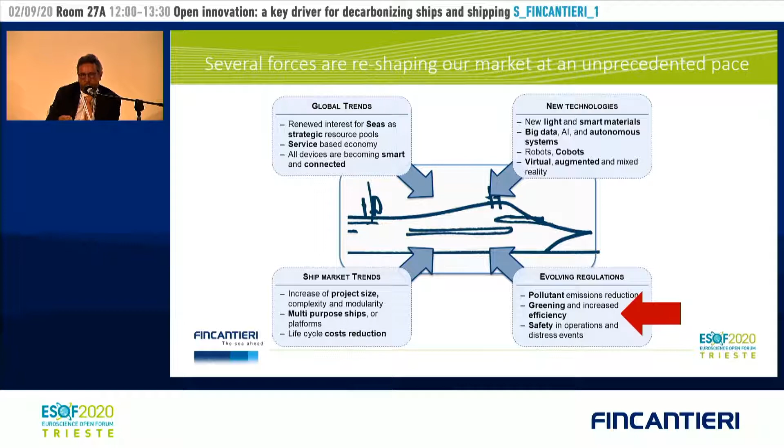One of the main reasons why we are talking about decarbonization is the evolving regulation, and also an increasing request from the customers, from the ship owners, and from the final customer to make shipping greener. We have developed 5 pillars in our research and innovation strategy, and the green ship, that is decarbonization, is one of the most important. For each of these pillars, we have defined very challenging goals.

If we talk specifically about the green ship, in the next decade we want to increase ship efficiency by 30%. We want to eliminate every ship emission in ports and halve navigation emissions. We want to promote the use of reusable and recycled materials during shipbuilding, and we will also decrease onboard and underwater acoustic emissions, that is noises.

This is a picture about how decarbonization could look. Today, the state-of-the-art technology is to generate electricity on board a ship through a combination of traditional internal combustion engines and liquid natural gas. This is the state-of-the-art today. What could happen in the medium term?

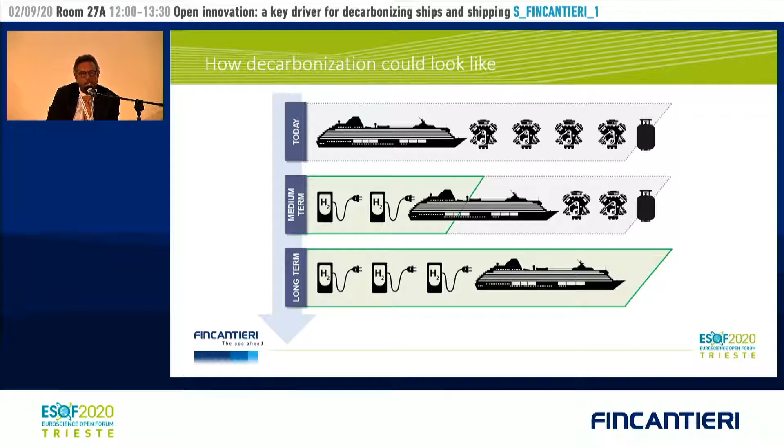In the medium term, we see some sort of electrification. We think we can use, for example, hydrogen for generating electricity on board a ship, and in the long term we could have cruise ships that are completely fueled by hydrogen.

Now, I would like to propose to my colleagues around the table, Pierluigi, Alberto, Alessandro, and all the others, this scheme to drive to some extent the panel. The main question we would like to address during this session is how difficult is it to decarbonize ships, which are the most complex tasks ahead of us, what are the risks and opportunities, and what is the right balance between incremental innovation and radical approaches in order to cope with this difficult task?

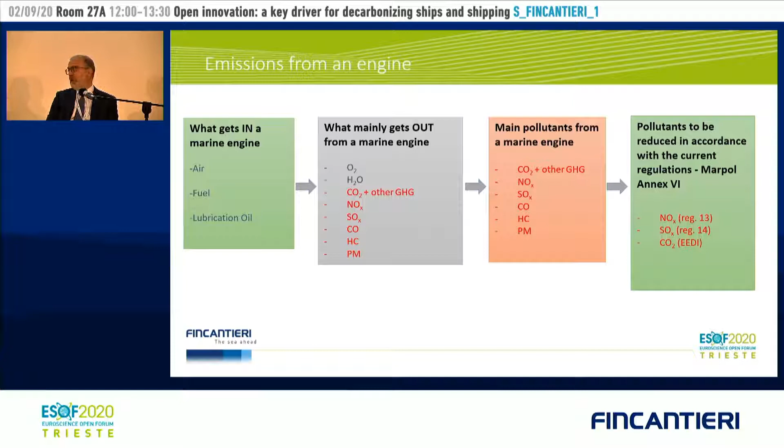In the regulation, there are only three main pollutants: nitrogen oxide, sulfur oxide, and carbon dioxide. Particulate matter is also mentioned in the regulations, but there is no limit set on particulate matter.

Which is the shipping emission in the world scenario? In the world scenario, shipping has a global emission of 18–30% of nitrogen oxide, about 9% of sulfur oxide, and 3% of carbon dioxide.

About the limit, the historical limit of NOx emissions, this represents the various stages that have been put on the table over the last years. We have up to 2011 Tier 1, up to 2016... Tier 2, and now for the ECA areas, there is the Tier 3 limit coming into force in 2016.

How can this be reached? This has been reached first by having engines certified EIAPP, and also by introducing the SCR to capture the emissions.

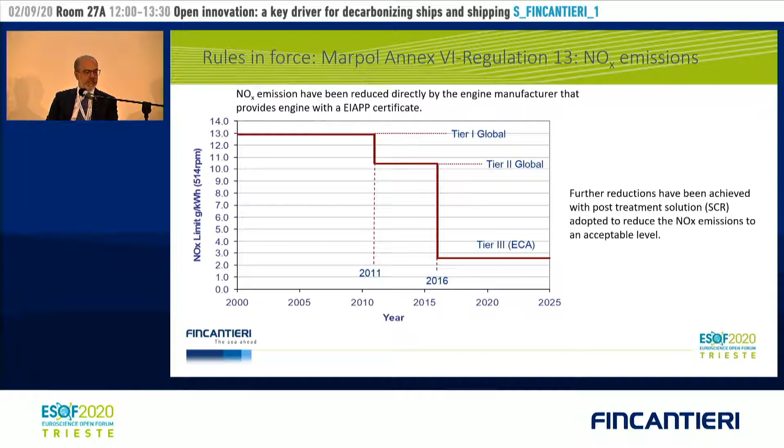This is the status of SOx, the sulfur oxide, where there are two diagrams, one for the global area and one for the ECA area. Today, the latest limit for the ECA area is about 0.1% of sulfur in terms of fuel volume. How can this be reduced?

In recent years, we installed scrubbers that allow us to reach this target.

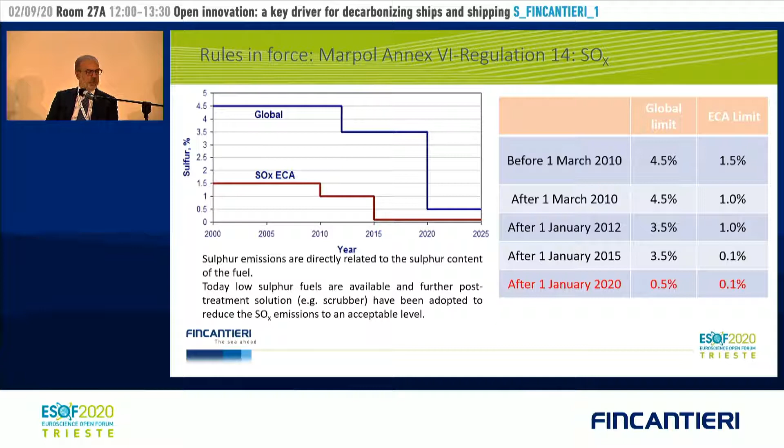After that, there is the EEDI, that's about CO2, related to the efficiency design index for the emission of CO2. Up to 2013, 2015, there was a limit below the reference line related to 2009 emissions.

After phase 1, we passed between 2015 and 2020 into phase 2, and the next target is between 2020 and 2025 to reach further reductions. There is also a phase 3 coming after 2025, but it seems IMO is discussing anticipating it.

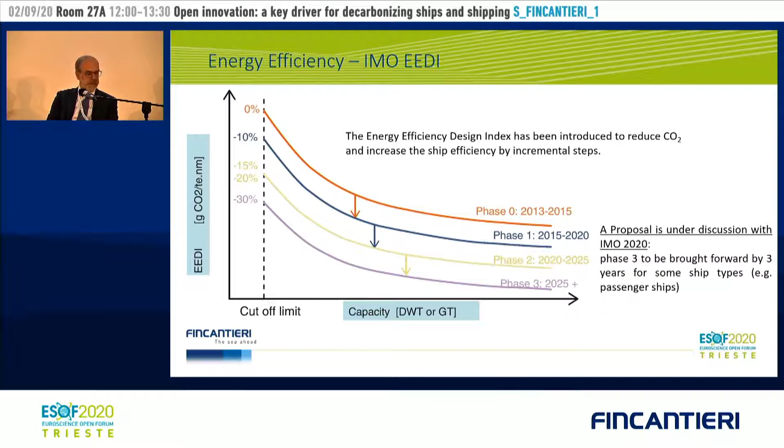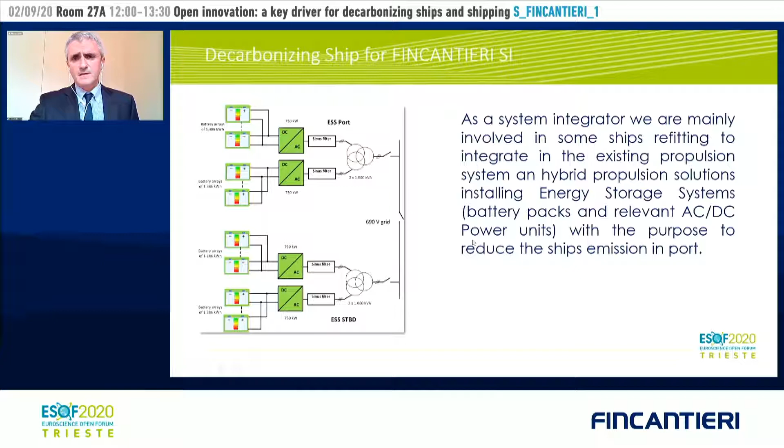An example of this application was Grimaldi cruise Roma and Barcelona, where the energy storage system has a battery capacity of around 5,000 kilowatt-hours and a nominal power of 3,000 kilowatts.

With this configuration, considering that the installation of this kind of system is to reduce the emission of the ship in port, we can identify the following operating modes of the ship.

During navigation, the ship is powered by the diesel generator, and the power units of the system are charging the batteries. During long port stay, the required power for the ship is provided both from the energy storage system in parallel with the diesel generator, with the result of reducing the number of diesel generators in operation.

The third mode is short port stay, where the energy storage system is the only source for the power supply, completely substituting the diesel generator. At the end, the UPS mode: in any situation, this system is always ready for ship blackout prevention.

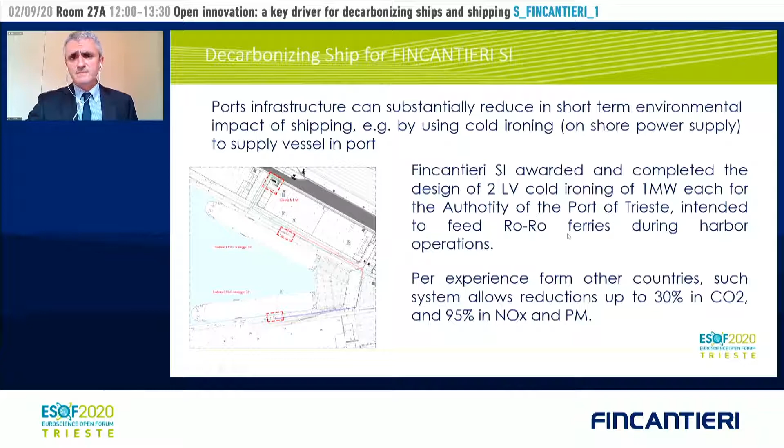Coming back to the original question, how difficult is decarbonizing the ship? It's clear that the use of battery systems can only be limited to operation of low power vessels and for short sailing distances. The use of clean alternative fuel can be a solution to guarantee the autonomy required by the ship. In this configuration, the battery will play the role of typical network services.

This means that the architecture of the ship must be redesigned to accept this type of solution. It requires space significantly greater than that required by a fossil fuel system.

What are the risks and what are the opportunities? We have the opportunity to improve the environmental behavior. So we believe that whatever risks are introduced by the new technology solutions, we are convinced that they can be addressed and mitigated. Thank you.

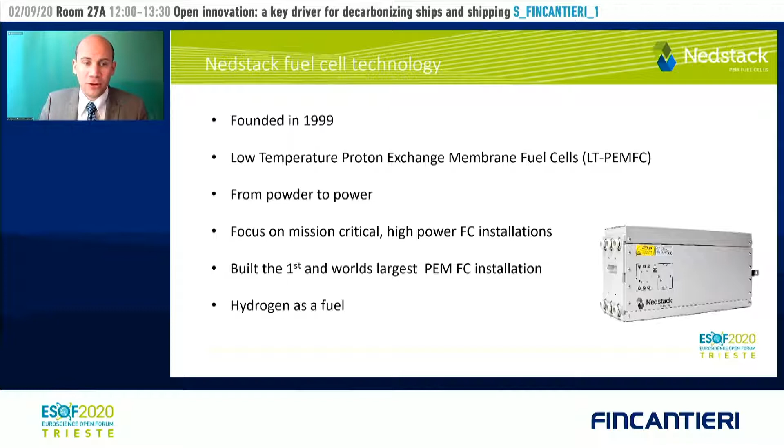We've been the first in the world to build a fuel cell power plant, and it's still in operation today, for almost 10 years now. And we were also the first to build a megawatt fuel cell plant as well as a 2 megawatt plant. What we do is convert hydrogen, pure hydrogen, into electric power and heat.

More recently, we have been working on the second generation of maritime fuel cell systems with a 50 kilowatt unit, which has been tested in sea conditions. And very recently, we delivered a 100 kilowatt fuel cell system.

So in our opinion, if we want to continue like we do now and do everything like we are used to, decarbonizing ships might be very difficult. To start with, economic viability is of course a key driver.

You need to be able as a ship owner to have a commercial business case to earn money with a decarbonized ship. And in relation to the current vessels and the current supply chain, a decarbonized solution is very expensive, both in investment and in operational cost.

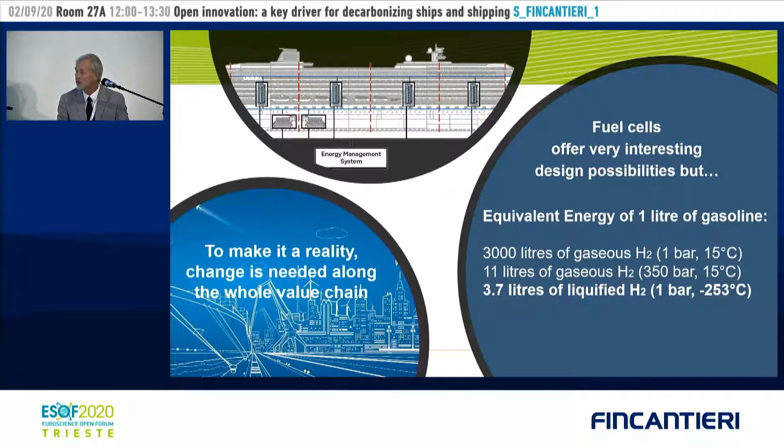Consider that 1 liter of gasoline would require 3,000 times more space if you use hydrogen at ambient temperature and pressure, 11 times in case of compressed hydrogen, and only, so to speak, 3.7 times more if you have hydrogen at minus 250 degrees. So it is clear that to make it a reality, we need a change across the board along the whole value chain. Thank you.

Thank you, Alessandro. These numbers were quite impressive, 3,000 times the storage capacity we need for having the same energy, it's quite an impressive number. I think it's one of the main difficult tasks we will have to face in the future.

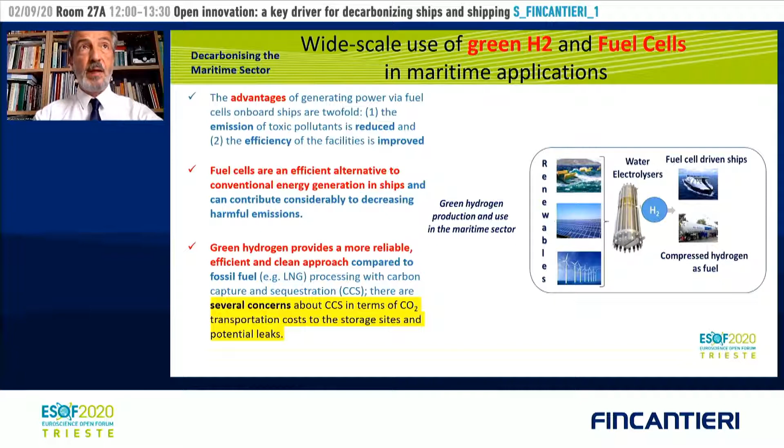I want to state that in 2018, for the very first time, IMO reached a global agreement on targets to reduce greenhouse gas emissions in transport.

Substantial challenge. Now we think that fuel cell technology using hydrogen can enable shipping a larger reduction, more than 90%, in gas emission. There are, of course, challenges for that.

Shipping fuel cell systems need to be scaled up because most of the solutions are modular now. So we must scale up to the desired megawatt while simultaneously addressing a number of questions: durability, compatibility with maritime conditions, new refueling facilities, problems with high volume fuel bunkering systems, so redesign overall is complex.

Just a few facts: the energy density is much higher for hydrogen with respect to diesel. The volumetric energy, however, is lower than diesel. The volumetric energy of hydrogen is higher than batteries, so that makes hydrogen technology more competitive for medium and large ships.

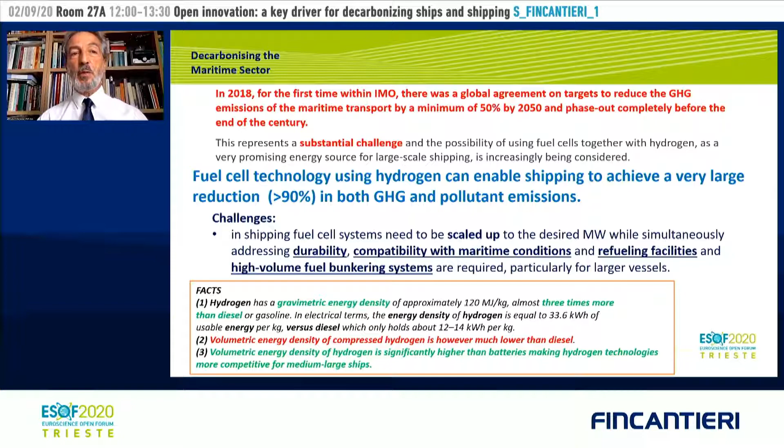So how difficult is decarbonizing the maritime sector? Well, there is the problem of integration of H2 and fuel cell within port operation. There are issues about developing hydrogen systems and fuel cell on-board operation. There are problems with market diffusion and competitiveness, and developing a regulatory framework.

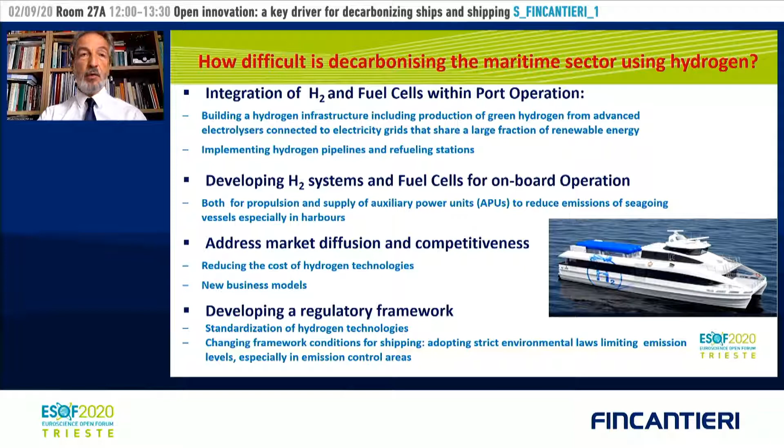So the risks are relevant aspects: solving specific technical aspects, addressing the cost of hydrogen technologies. There are good opportunities for climate protection, new strategy for the market.

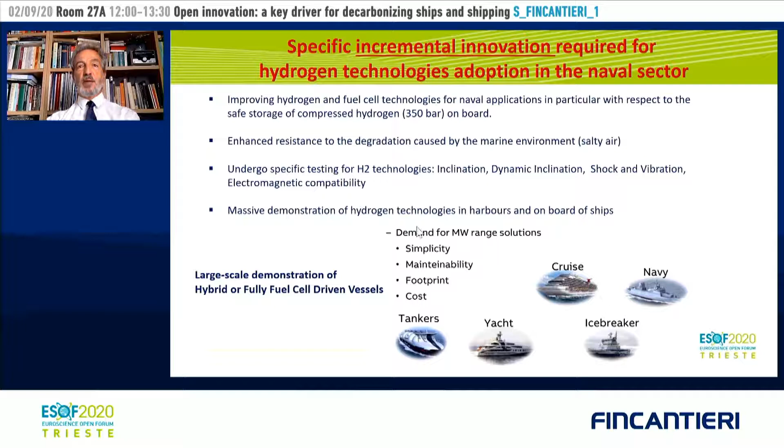Problems with bunkering approach for hydrogen, and the potential scale gap for 20 megawatt.

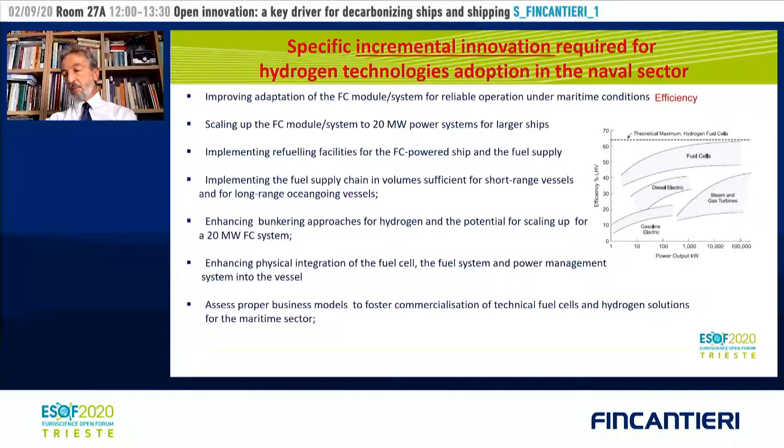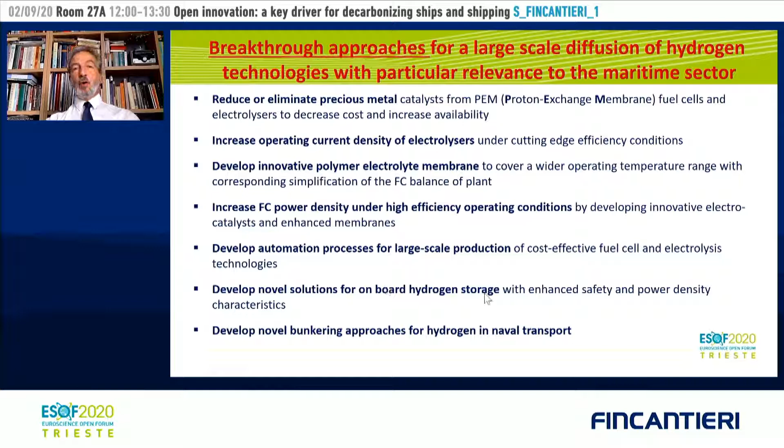And then problems with large scale production and novel solutions for storage on board. Last slide: both motor sailing and pleasure boats, project which we are working on.

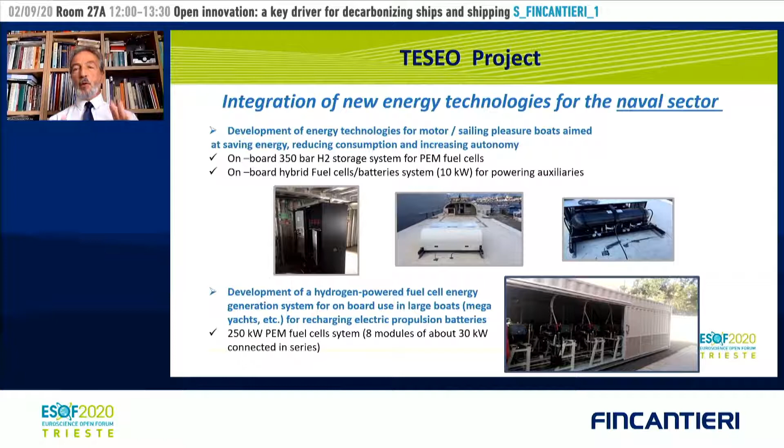Thank you, Emilio. Unfortunately, it was very difficult for us to follow your speech. I would suggest for the next round to try to change the mic or getting rid of this problem, because the slides were very interesting, but we were not able to get your words. In any case, thank you for having shared the perspective of the research part of the puzzle.

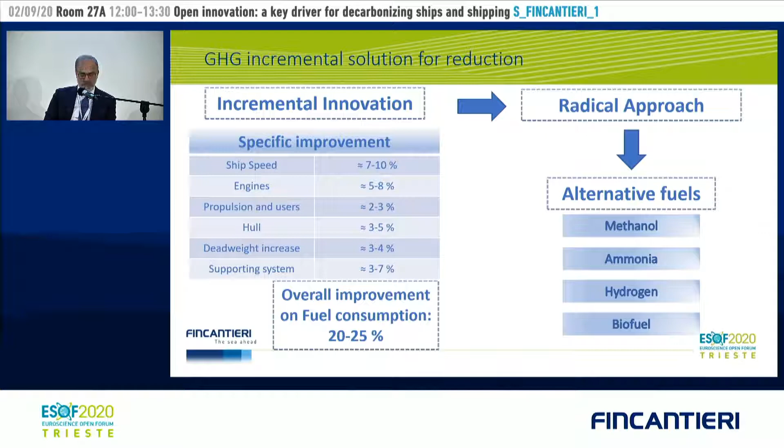As my colleague said, we need a new logistics for the fuel. As already anticipated, the alternative fuels are methanol, ammonia, hydrogen, and biofuel. Each of them has different problems, but in any case, for all the fuels there are issues of availability, handling, and storage space, as well as technology for energy transformation, ship performance, and safety regulations.

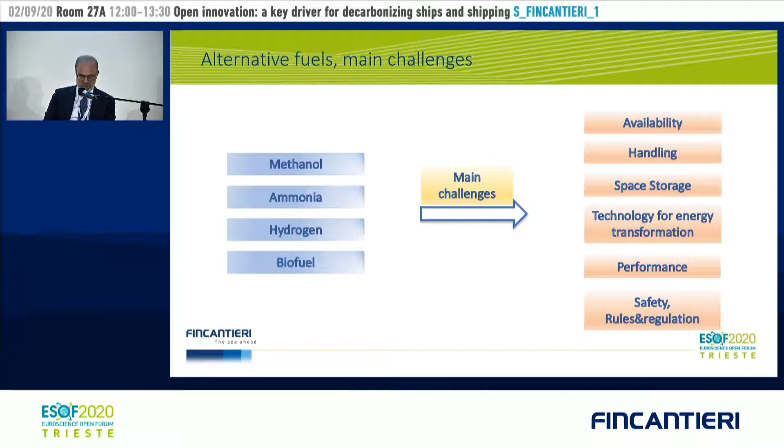Here they show the characteristics of each of these alternative fuels. As you can see, there is no single fuel you can point to as the right one. So, as anticipated by colleagues, there is no clear view on which will be the fuel of the future.

For sure, there is the chain. As I said, the chain starts from the production of the fuels up to the users, meaning up to the ships. The shipbuilder is concentrated mainly on the last part of the research, which in any case depends on the first part of the chain.

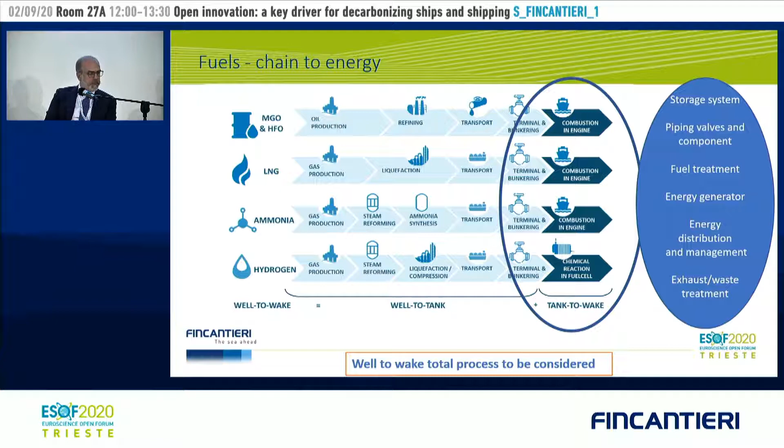So what we conclude is clear that a closed approach cannot be followed. We have to use an open approach because such complex targets and complex issues can be reached only with an open approach. As said by Massimo, as a shipbuilder managing such a complex product, the open approach to innovation is in our DNA. So we confirm that this is what we need and this is our intention to follow.

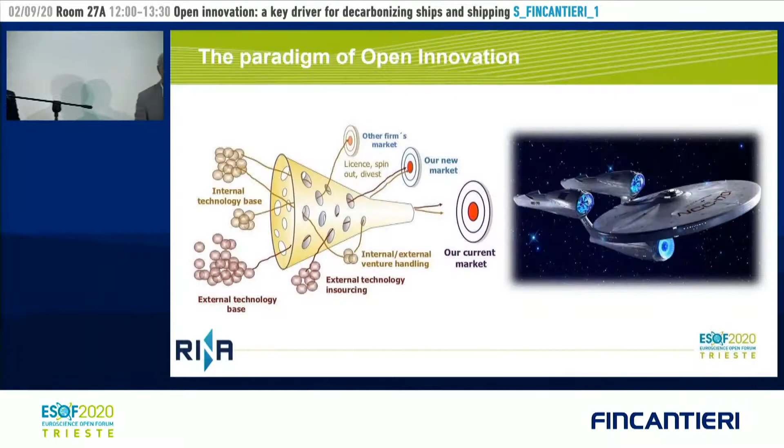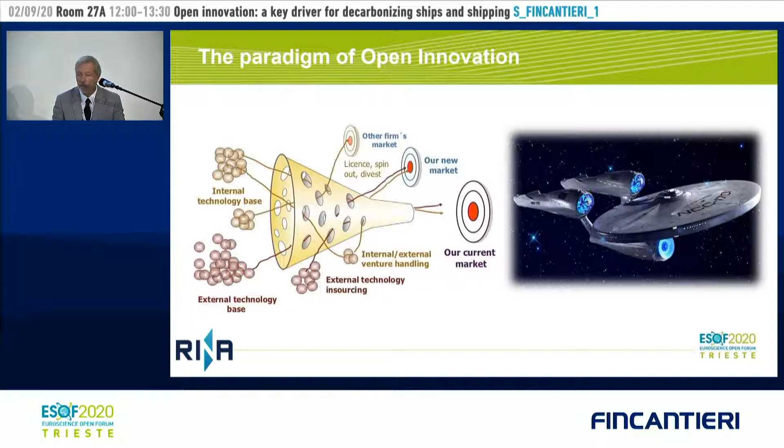Well, I tried to make my point using the presentation. You can see here the picture that you can find in literature showing the concept of open innovation, that is cross-fertilization between what you produce inside and outside your organization, but also the consequences in terms of market exploitation, and this is probably the only way to produce a quantum leap innovation. It is also clear that DIY solutions are not fit for purpose. We are not producing fragrance or fashion, so this is a global challenge. We have to play together, otherwise we will be out of the global playground.

Where, why, and who? The excellence centers are spread all over the world, so it's not something that happens only in Trieste or Genoa or Hamburg or Shanghai or Miami. It is everywhere because we have a group of experts that cover with their competence what is needed, where it is needed, and the smart distribution of RINA competence worldwide is the key to provide a quick answer.